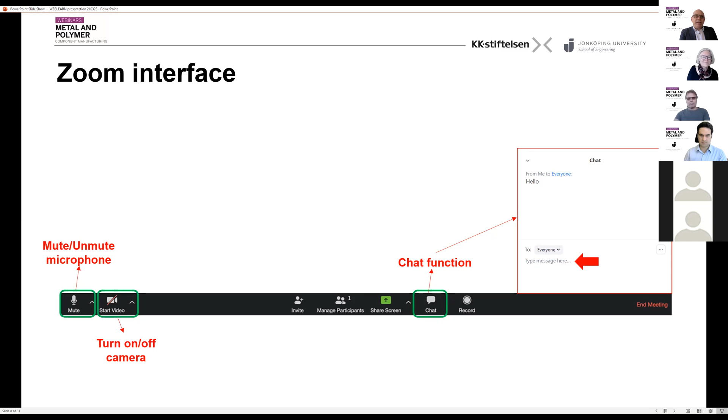Yes, thank you very much, Stefan. Well, today I will be talking about routes to high integrity casting, and it's a little bit of a process overview. You will see a small pink arrow over here and there, and I would like you to focus on that one when you see it, because then I'm talking about this particular element in the pictures that I will be showing.

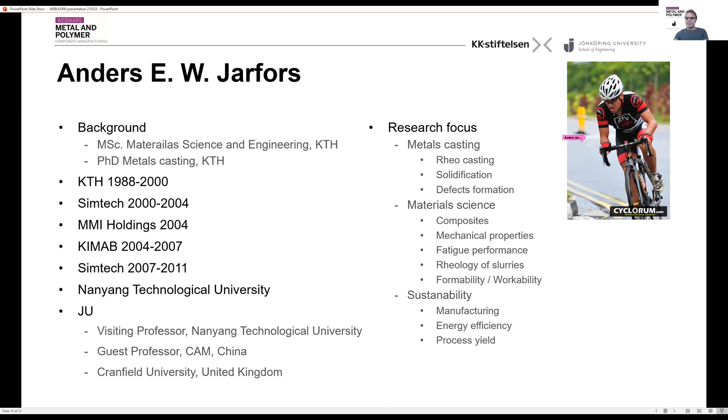We know that from the beginning we had a bit of downsizing with the fuel crisis. But everything that has to do with lightweighting and downsizing in terms of weight means material reduction, material substitution. We're also talking about cost effectiveness today, and that means that instead of joining many small parts, you can cast and functionally integrate in casting.

This means that defect management becomes very important, because we want ductility in the parts. We definitely want crash-safe cars, and we do not want a lot of scrap, because if you cast something as big as a quarter of a car, there's a lot of cost in that, and we definitely want high process yields. So there are many different ways of achieving high integrity castings.

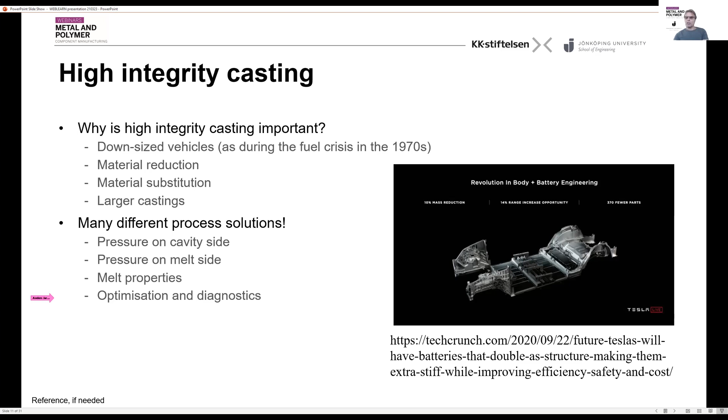We can work with the pressure on the metal side, meaning increasing the pressure. The difference between the cavity and the metal side is also very important, because that drives the filling process. We can also work with the melt properties to change the behavior of the melt. And what you'll also see from Lothar a little later today is optimization of the process, diagnostics, and things you can do with modern technology. So next, please.

One of the most standard processes for high quality castings is low pressure die casting. In low pressure die casting, you have a furnace cavity or compartment which is hermetically sealed, and you increase the gas pressure. That forces up the melt through the stalk into the die cavity. To avoid a turbulent fill, you can calculate a critical speed using the Weber number, and you end up with about half a meter per second as your fill speed. For low productivity processes and short fill lengths, this would be sufficient, but when casting a quarter of a car, you need much higher speeds to do that. So we can take the next.

There are some ways of improving the low pressure die casting process: the vacuum riserless and the pressure riserless casting systems. For the vacuum riserless system, you have a hermetically sealed compartment above the actual die system, where you suck up the melt through vacuum into the die cavity. There is also the pressure riserless casting, where similar to the low pressure die casting system, you have a compartment where you increase the pressure and force the melt up.

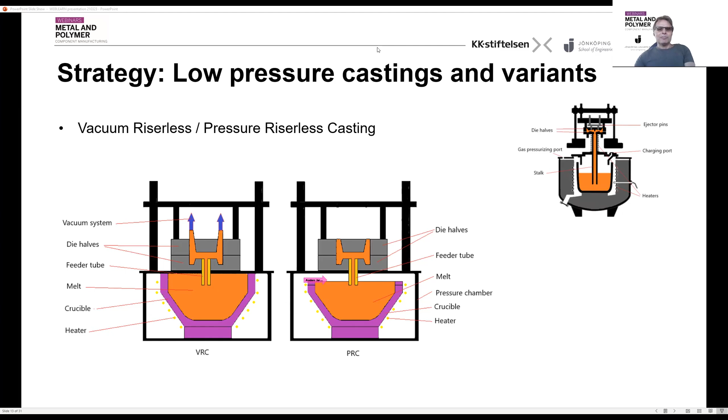There is another way you can do this, and that is counter pressure casting, which works in a similar way. You have a system where you pressurize the furnace chamber, with a hermetically sealed compartment around the actual die itself. You can pressurize the chamber, forcing the melt up the stalk, or work with super pressure in the furnace in the die compartment. With increased pressure in the die compartment, you can get a more quiescent type of fill during the process. Melt breakup is not as likely as it would be with vacuum, for instance.

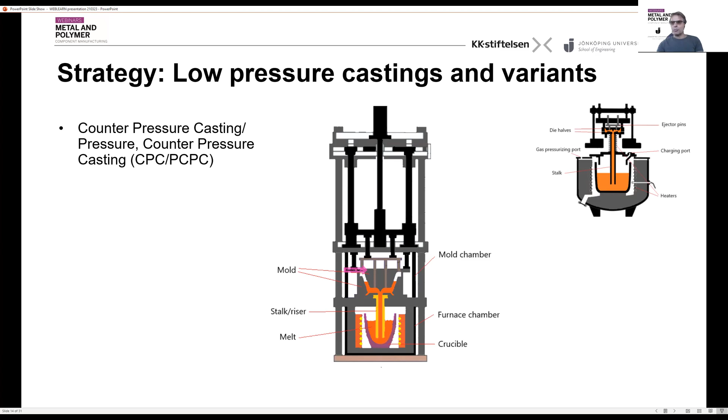You can work with the pressure difference between the furnace compartment and the die compartment to control the fill. By varying the two pressures, you can also control the speed during filling, because speed during filling is essential for all these casting processes.

Talking about all these counter pressure and low pressure die casting processes, they are normally for larger car parts like wheels, with moderate productivity. If you really want higher productivity, you need to use high pressure die casting. High pressure die casting works by pressurizing the melt directly with a piston instead of pressurizing the furnace compartment. So instead of working with the furnace, you have a hydraulic system and can increase the pressure significantly. The new variant here is to work with melt side pressure, which means you can squeeze and reduce the size of porosity.

There are ways also where you use extreme pressures, like squeeze casting and liquid forging. You can also work with reduced pressure on the cavity side - not really a counter pressure, but more evacuating the chamber itself in order not to entrain gas during filling. But then there's a lot of work to control turbulence, and ways to work with changing the viscosity of the melt, which we will come to.

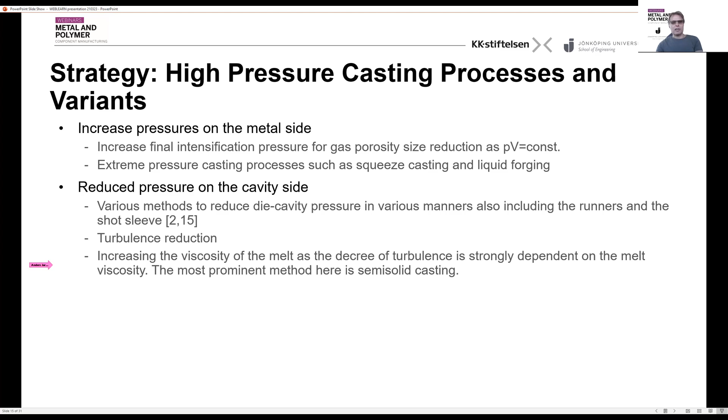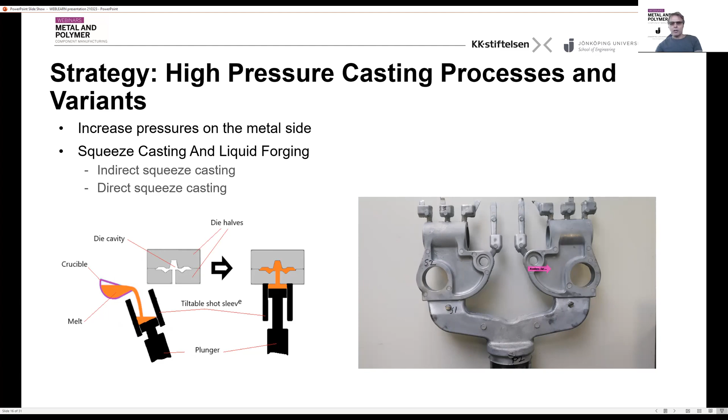Next is direct squeeze casting. The difference is that you do not have a plunger moving the melt into the die cavity; instead you pour it into the die cavity and use a punch from the top, just like a forging operation, squeezing the melt under high pressure. This gives a very pore-free result, and experience shows that if you reach about 50 megapascals of actual pressure in the die cavity, you will get a pore-free structure.

There are other ways of working with this, such as a process called liquid forging, where the actual geometry sits in the punch itself. This is formed like a backward extrusion process, and the fins you see here are 6 centimeters high and about 1 millimeter wide.

And they can be cast in many different alloys. In this particular alloy casting, it is 6061, so it's a wrought material. And you can actually bend these fins around their own radius.

In general, when you look at the common materials that have been squeeze cast, you can see that you get decent properties, but foremost you gain on elongation. The issue with this is that size is, of course, a problem in squeeze casting because you need very large machines and such.

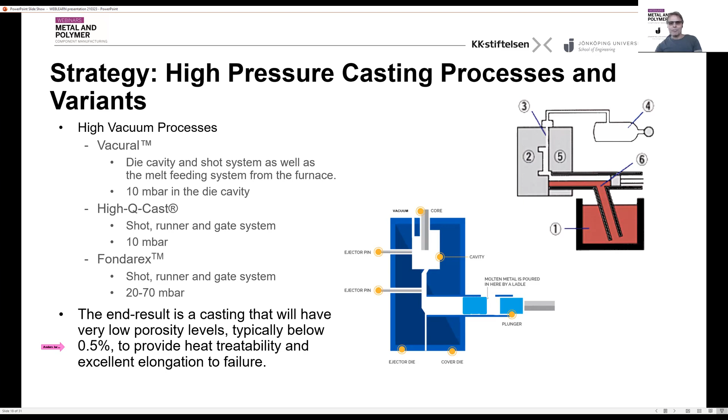Now, in all these processes, the die release agent can definitely cause a problem. And I would like to show you here one little example, because it's not only the pressure in the chamber that is important.

This is from a study with a foundry that had a problem on rainy days, where you had a very large rejection rate on the rainy day, but on the sunny days, it worked like a charm. It turned out to be so that it had to do with the evaporation rate in the die, and there were some clearances between different parts of the die where you had die release agent getting stuck.

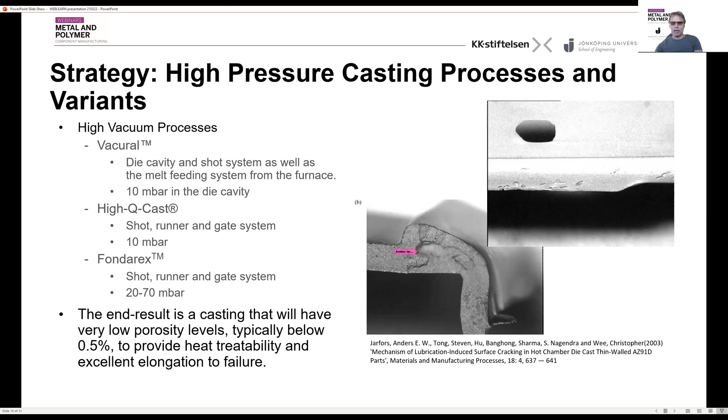At this point, you can see a bubble trail moving through in the same direction as the fill direction. These little bubbles have been pickled - we pickled away the surface so that we could reveal these types of porosities that you would find. And this is one of the problems. So vacuum does not really solve all the problems, but you also have issues with die release agent and the use of that. So you end up, when you want to do high integrity casting, with a very complex situation. I will come back to that later.

Now, another way of working with this is to look at semi-solid casting. This equation may not be very famous to many of you, but it's from Albert Einstein and his thesis, Eine neue Bestimmung der Moleküldimensionen. He studied slurries in his early days, and he developed an equation for viscosity where Fs is the solid fraction. This is for dilute suspensions.

And you can actually use this concept by understanding that if you have a certain portion of solid, you will increase your viscosity. That means that if you abide by rules such as increasing the viscosity to maximum that you can, which means using the highest possible solid fraction, that means you get the highest viscosity, which would be a turbulence reduction.

To enable fill, you need to use the highest possible die temperature because it aids the filling, and you can also reduce the fill speed. Even though you use a high pressure die casting system, you can significantly reduce the fill speed in semi-solid casting, and that means you can reach a defect-free material.

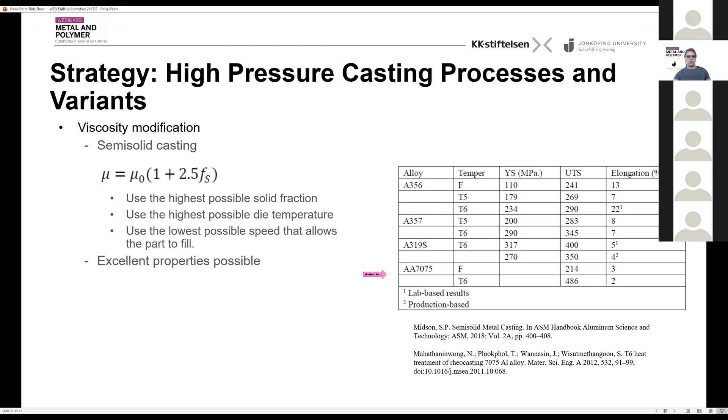One should take care here that you cannot do this effectively for eutectic and pure metals on a large scale, so that is a limitation. It depends on your material selection. We can take the next.

Now, looking at this, there are some additional advantages. If we set 0.5% here as porosity, and compare conventional high integrity casting with rheo casting, combining all possible means - using vacuum and high pressure die casting, rheo casting and vacuum - this is the end pressure of the machine, the intensification pressure at the end of the fill. You can see that to reach this 0.5%, you need a lower end pressure for rheo casting, which is the lower line, than for the upper line, which is conventional casting.

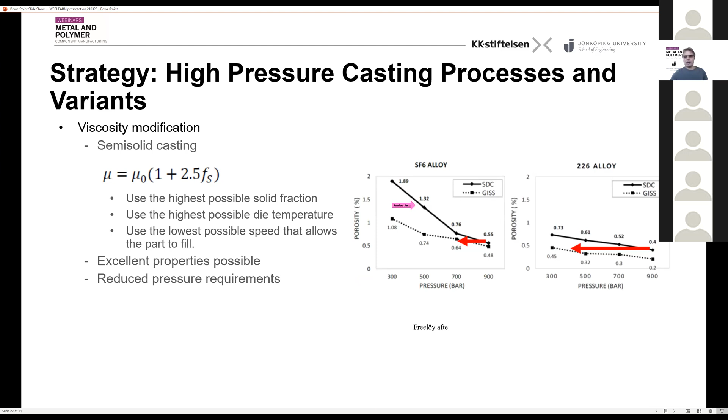And that means you can actually cast the same part in a smaller machine because you require lower pressures. In terms of supply chain, you don't need the largest machine available - which, if you take the 6,000 ton machines, maybe only 10 are available in the world. But if you can do that in a 4,000 ton machine, there are many more machines available. So that is also supply chain support.

So we can take the next. Now, there are also some other bits and pieces here. I just wanted to show you this, which is the fill length - how far you can fill, knowing that we can change turbulence.

If we look at the fill speed, knowing that when you have at least 30% solid phase, your heat transfer coefficient, H here, is about half of that for conventional casting - that means if you lie in the range between 30 and 50%, you get better fluidity as well. So that is another argument for working with viscosity modification as a means of making high integrity castings. So we can take the next.

In general, I'd like to summarize this initial part by saying that if we look at low pressure strategies, the important part is really to allow a slow, quiescent filling. That is done by controlling either the actual pressure increase or the pressure difference between the die cavity and the furnace side. If you go to high pressure die casting, you have many more strategies.

Okay, can you see it? Yes, and you can hear me, obviously. Super. My name is Lothar Kallien.

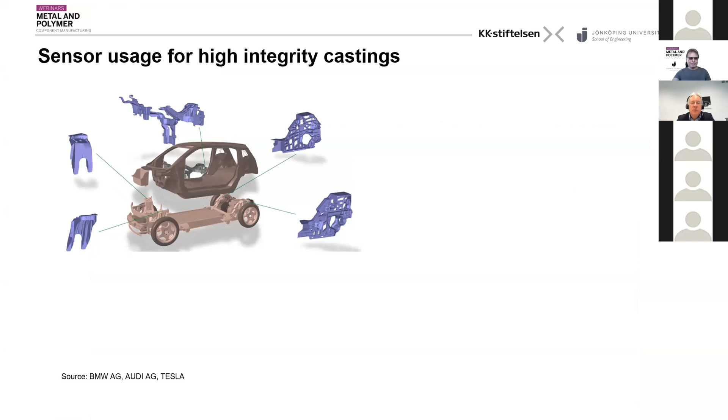I'm from Aalen University of Applied Sciences in Germany, and I'm going to talk about how to control the process a little. And I have some nice pictures again, because foundry is something old-fashioned stuff, but since we have electric cars, not only from BMW, the i3, but also Tesla, we are in everybody's mouth, because we may be able to make lightweight, thin-walled parts which can substitute steel parts.

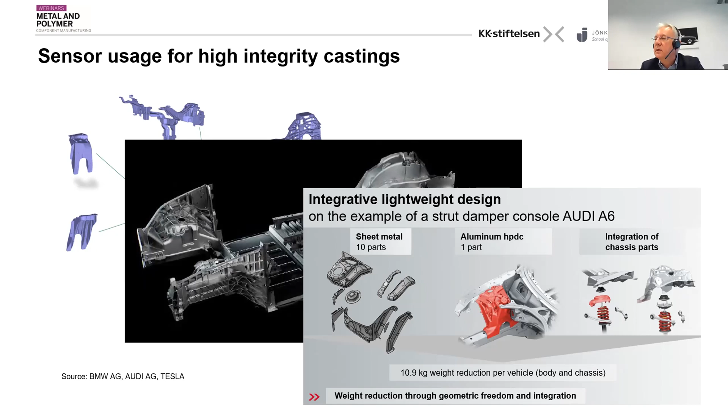Sheet metal parts is my favorite overhead from Audi: 10 parts substituted by one aluminum part. Here you can see in high pressure die casting gives you a weight reduction of 10 kilograms per car. That's huge. And this is just a very new picture.

I just added it because it shows from the new Tesla. The old one, left side, is 70 parts, and he is going to substitute it into one part. And what you need to do this, of course, is a huge machine.

Anders already mentioned that it's a 6,000 something ton machine, and it's very huge. Tesla ordered the first machine which has more than 6,000 tons of locking force. That's crazy, but Elon Musk can do it.

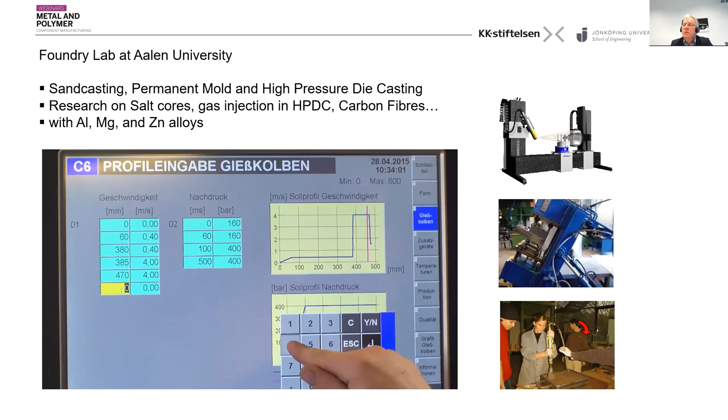Okay, what are we doing in our lab? We have a very nice lab with 3 high pressure die casting machines. We can do sand casting, permanent mold, and we do research on salt cores in high pressure die casting, gas injection in high pressure die casting, and carbon fibers, and we can run aluminum, magnesium, and zinc alloys.

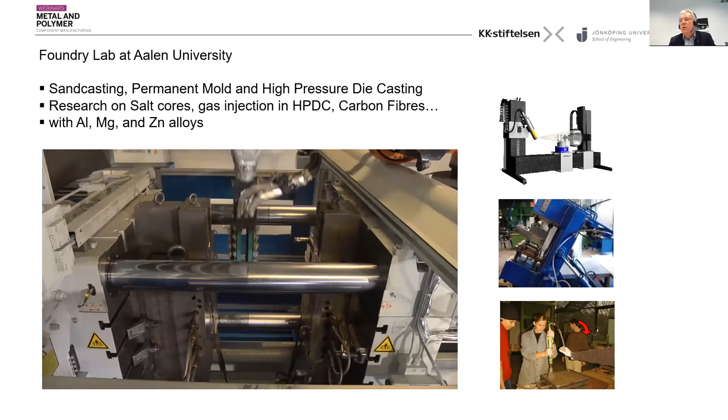Here you see our middle machine, 400 tons, doors closed. We have automatic spraying - this is a parting agent Anders was talking about. We have a new system to dose the metal into the shot chamber. In this case it's aluminum, but we can also use vacuum, magnesium, and all that stuff.

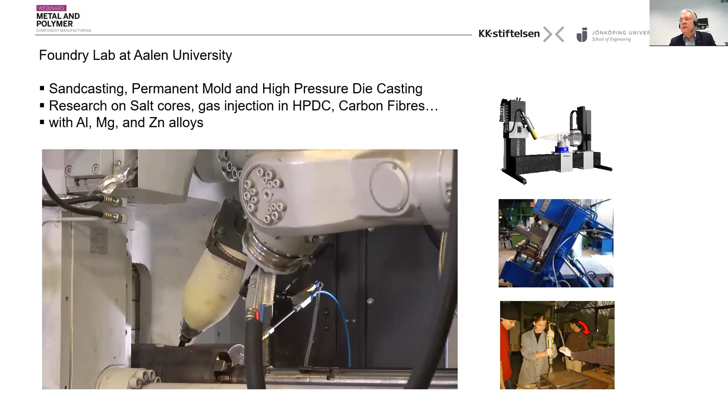And so this is the plunger. The shot is coming now. It's moving relatively slow at the beginning, but fast during filling to get very short fill times. And then we can open up the die and have a very nice part, which is typically taken by a robot in an automatic production cell, but here we do it manually.

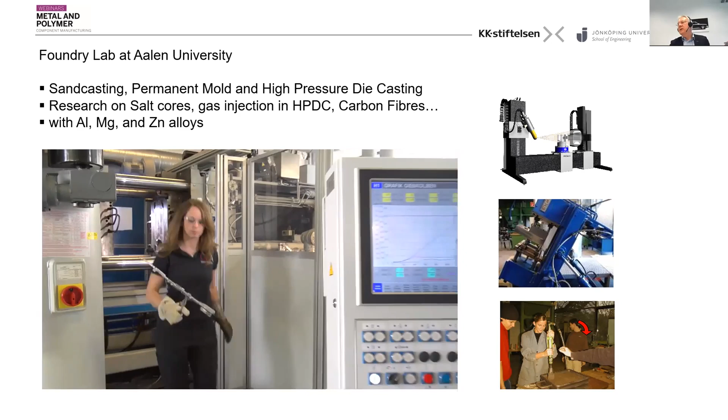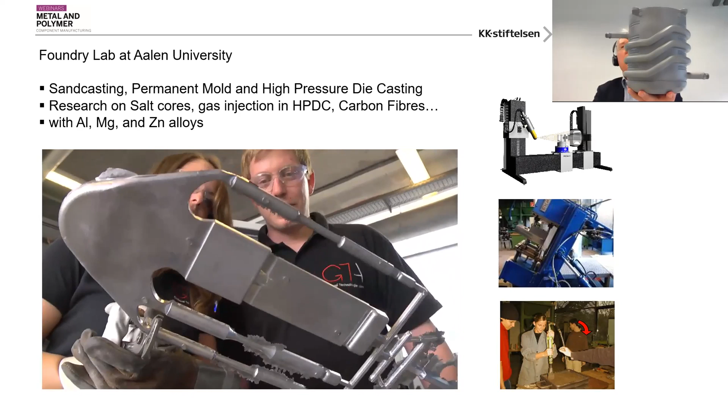And what is very interesting, I can show you here in the hand - this is the best we all did. This is a housing of an electromotor, and this electromotor is for an i3. It's a demonstrator only, I must say.

And the cooling channel we put in by blowing gas with a lot of pressure, nitrogen in here, and all the liquid melt is blown out on the other side. This is a length of 2 meters 35. So this is, I think, unique - the only people doing this crazy stuff is here in Aalen.

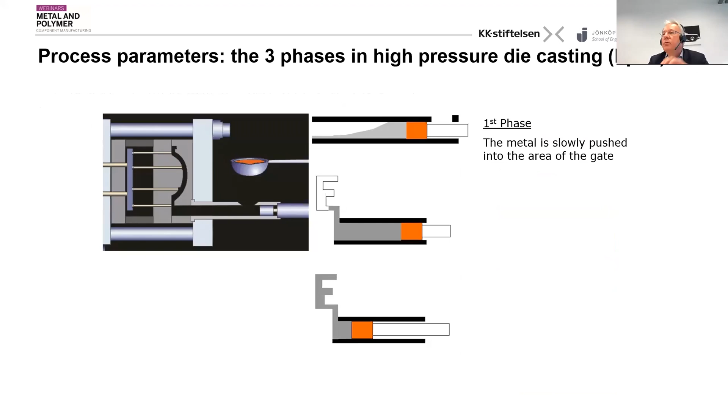Okay, but now we come to the 3 phases. The first phase, the metal is put slowly to the gate. And in the second, we have wave formation, pre-solidification. A lot of problems can evolve.

Second phase, where we have the metal shot into the chamber, into the cavity, with very short fill times - 30 to 50, maybe 70, 80 milliseconds. And then we have the third stage, where we can get shrinkage porosity. We apply a lot of pressure just in order to feed and have no porosity due to shrinkage in the part itself.

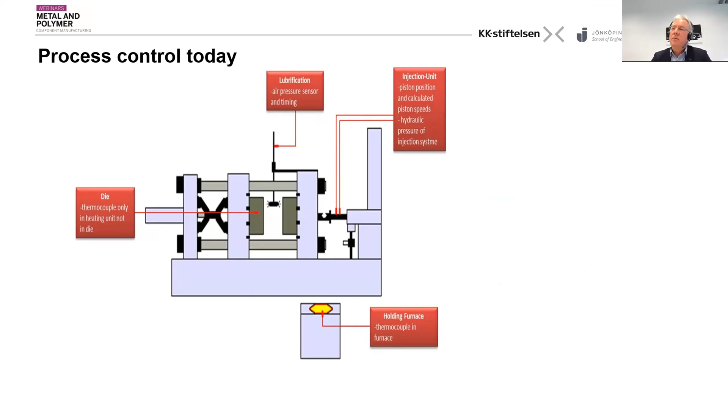What do we control today? Basically not a lot. We have a temperature in the holding furnace. We have the injection unit where we at least have a shot profile. Lubrification - only a minor few people do it - and die thermocouples, I don't think a lot of die casters use it.

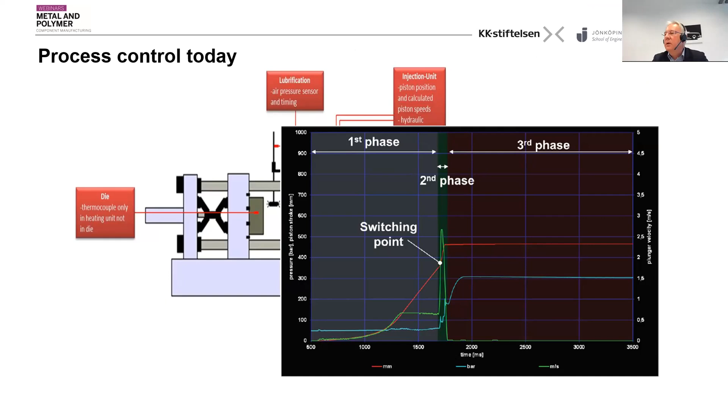So what we get is this shot profile: first stage, second stage, third stage, pressures and velocities of the plunger, and then we can calculate the velocity of the melt and stuff like this. And we can get a lot of information from this.

But the dream of a high pressure die caster is to understand the process, and this is what I'm going to talk about in the next 20 minutes. What should we use? Control much more data from the evacuation, from the die cast machine, from the lubrification, and everything.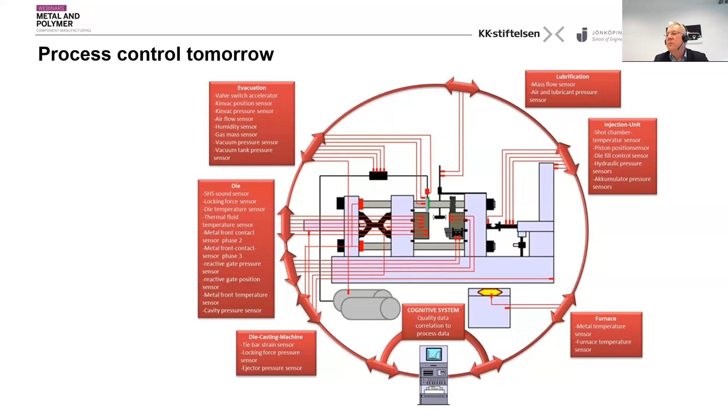But the problem is we have so much data now, we need to understand the data. This is going to be the problem. We had a project called Music, a long time ago, where we tried to get a cognitive system where we get all the data in, but then you also need quality data. This will be the thing we talk about, to understand and then control the process with this.

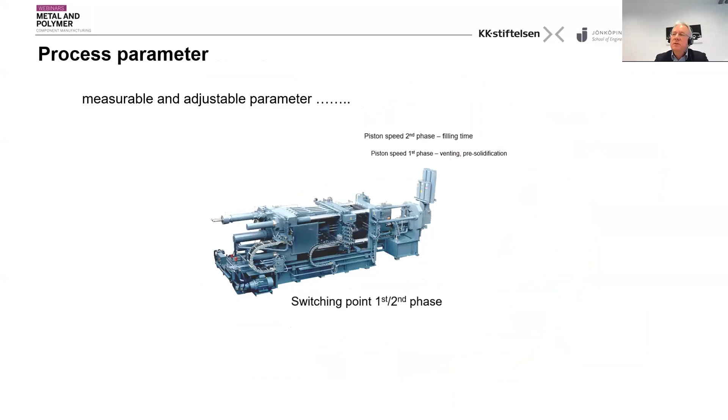So we have a lot of process parameters. Some people say 200 parameters in high pressure die casting: piston speed, first stage switch points, holding pressure, mold temperatures, flow rates, cooling time, and so on. You can talk half an hour about every process parameter here. But also the other parameters I showed, we think we can control them.

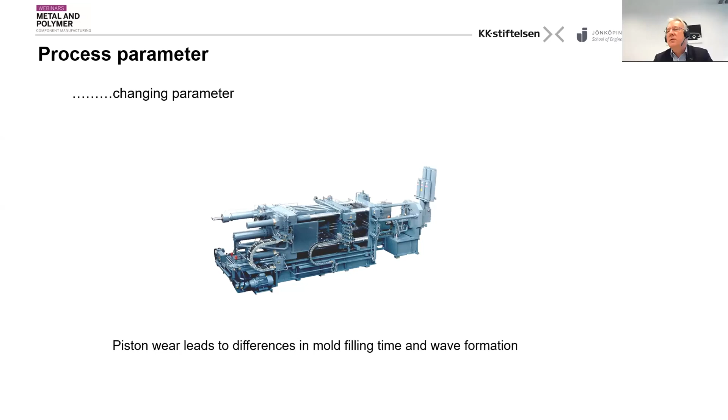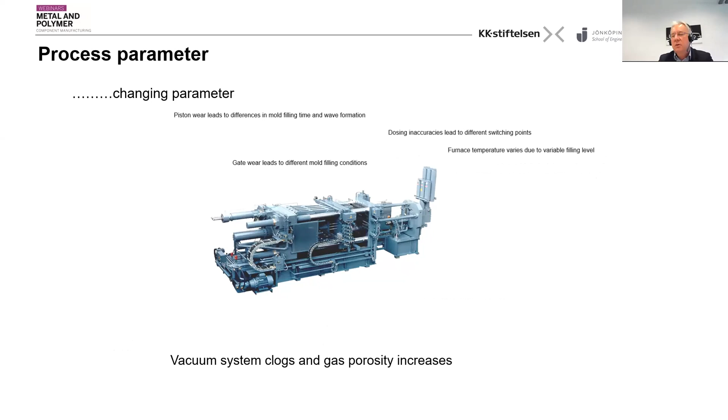But we also have parameters like these that change during the process. Piston wear, or dosing changes, or gate wear, or furnace temperatures vary because people put fresh liquid metal in with another temperature, which changes the process as well. So we can talk about parameters again for half an hour, at least about those which change.

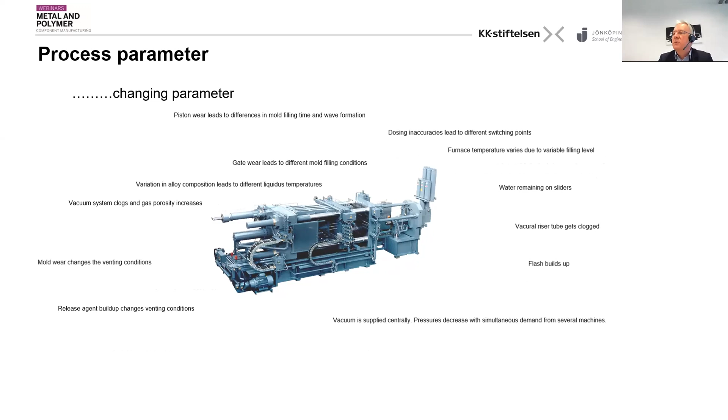So the big thing is we have a lot of process parameters. Now we need sensors to control it, because later quality analysis in the forecast is a goal.

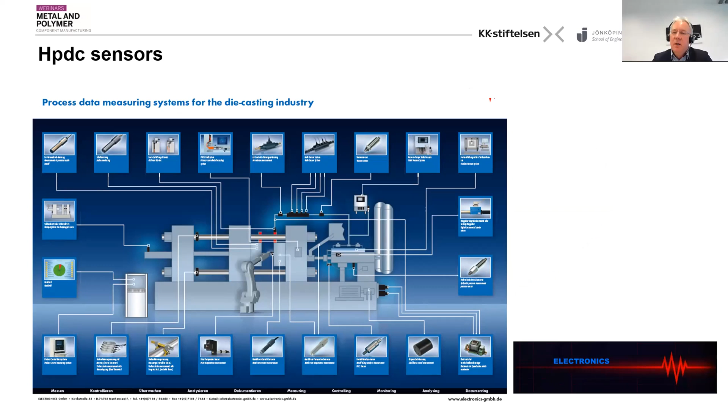And we have a very large amount of sensors because we have a very good company in Germany, called Electronics. If you're really interested in sensors for high pressure die casting, talk to Mr. Gauermann. He's the owner of Electronics, and we have worked with Electronics together for a very long time. They are very innovative people and have, as you can see, a variety of sensors. I'm telling you about our experience with sensors.

The first thing on the left-hand side here you see is cavity pressure sensors. I think that's very important because you only calculate pressures from the third stage, plunger pressure, into the melt. But now you can see with these cavity pressures, which hold up to 2000 bar, and they last a very long time. We never made 100,000 shots with them in the lab, but I think they do at least last 10,000 shots or something like this. So they're ready for industrial application.

You get information about cavity pressures inside the die, and this is really important for the quality of the part. On the right-hand side, of course, you have classical hydraulic pressures, which are used for a conventional shot chamber, shot profile already today.

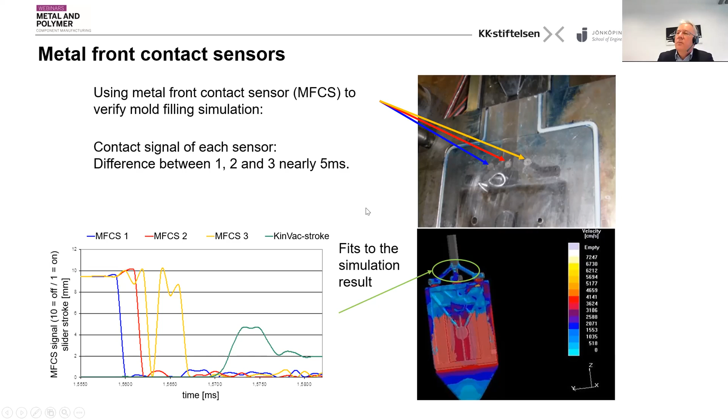What is also new? Metal front contact sensors. For our gas injection process to produce these parts, we need to know exactly when the metal is where. So we can build in sensors which have a little electrical contact, and you can see here 3 sensors in these points giving you different signals. You can, for example, also control simulation. Is the simulation you made with Magma or another code, does it fit to your real experimental idea in the die? What is happening there? This is also very interesting and not very difficult to install.

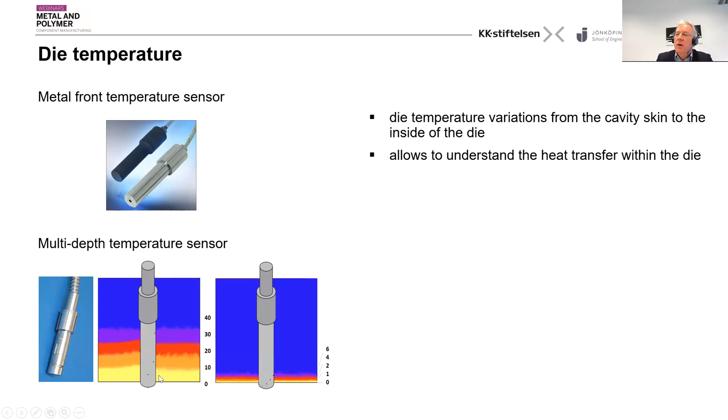Also, die temperatures, very crucial for the quality of a part, is the metal temperature, but not only the metal temperature right at the surface, but also inside the die. Electronics offers a sensor which gives you multi-distance readings. Right here, right here, and this shows you the reading you get out of it.

But again, until now, not a lot of people are using it. And I don't really understand why.

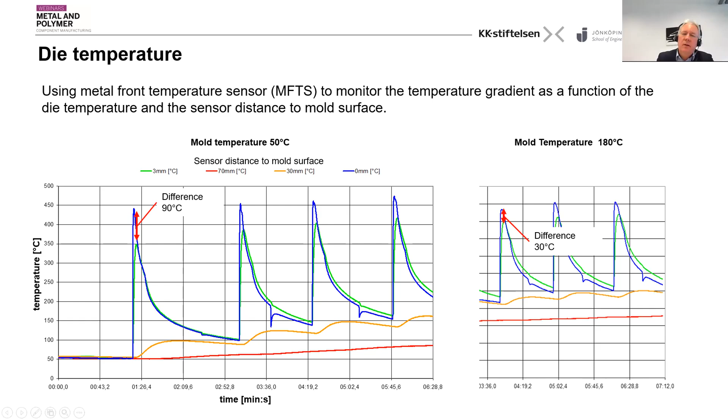The die temperatures are, of course, very much controlled by tempering oil. You have oil cooling and heating systems near the machine, close to the die, and you set them to 50 degrees or 180 degrees, and you assume the die will, after a certain time, also have 180 degrees. But nobody really controls the flow. Is the oil really flowing into it? I think this is a very inexpensive, very good usable tool to control oil flow, not only temperature, but the flow rate.

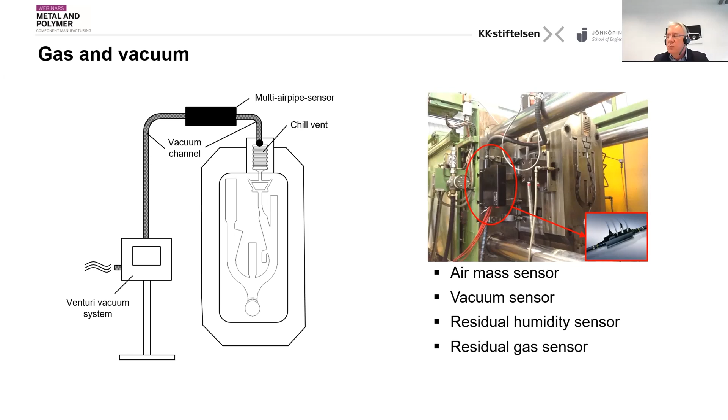Anders already mentioned vacuum. This is very important, and we use Vacural process, but also classical standard vacuum processes. What people measure here is only basically the pressure in the cavity. But here we have a multi-airpipe sensor, and it measures the air mass you take out of the mold, the vacuum, the pressure, the humidity of the air, and this is very important. It's a very innovative new sensor, but I'll show you some results, and residual gas.

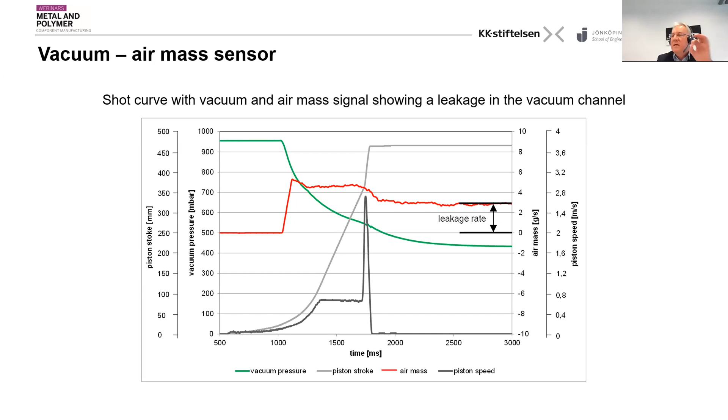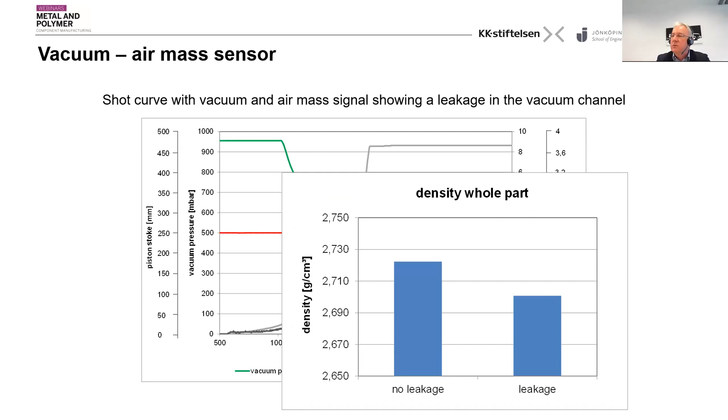What we see here is a shot curve with vacuum air showing no leakage. You can see here in this sensor, this is the air mass, not the pressure. Vacuum pressure is the green line, and the gray lines are just piston speed and stroke. And here you see the same with the leakage rate, and you can clearly see a big difference, which does not show up so clearly in the green curve, but the air mass clearly shows the difference. Of course, we also measured densities, and this is clear: no leakage versus leakage gives a big difference in density of the whole part.

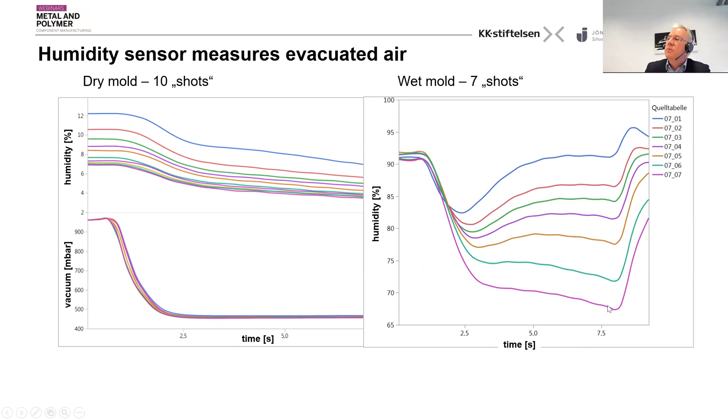What else do we have? We're talking about spraying. This is also important — we have a flow rate sensor for the parting agent. That's been available for a long time, but again, not a lot of people use it. We built it in, and I can tell you it's very important to control this. You can also see the difference very clearly in the infrared camera picture of the temperature of the die surface, I'll come back to it later.

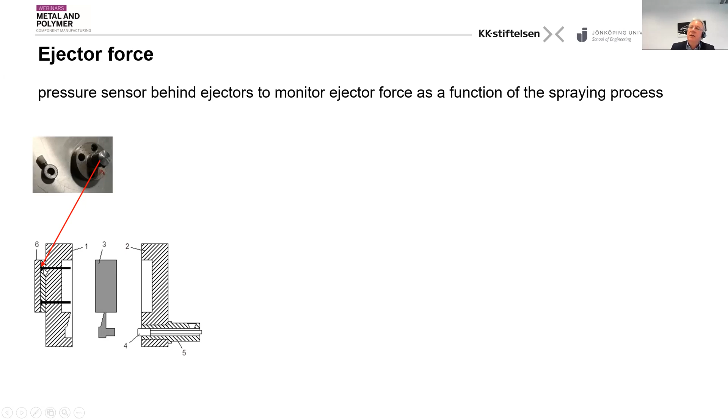Another sensor we use a lot for parting agent control — some people ask, can you give us an idea how different parting agents work, is one better than the other, do you have numbers? We developed a tool where we measure the ejector forces. So we have pressure sensors, as shown here, behind the ejector pins, so when we eject we can measure the pressures and get information about what is happening.

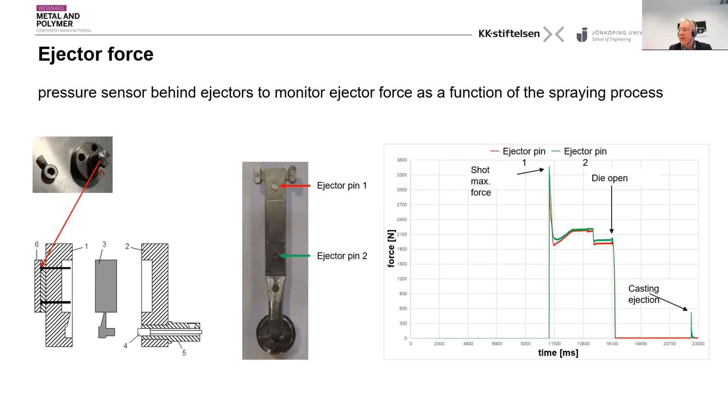Of course, we also measure the shot force during the shot, third stage, then the die opens — but here the small signal, if you widen it, you can see big, large differences between different parting agents or parting agent processes. So this is a very important tool also. I'm not sure whether it's usable for control in the sense of making full sense, but the maximum value, for example, you could use for a standard control in an industrial process.

Another thing another company, Motul, has developed — though I think it's available from other companies now too — is a spraying control unit using an infrared die signal. They take the temperature of the surface of the die to control the parting agent flow, but also the air blow. The time and amount of air blowing costs a lot of money and a lot of cycle time, and nobody wants to do it.

But you need to prove that your die is really dry, because otherwise you get real quality problems. That's a real issue here. Too cold, of course, gives you cold shuts and stuff like this, but it's also not so easy.

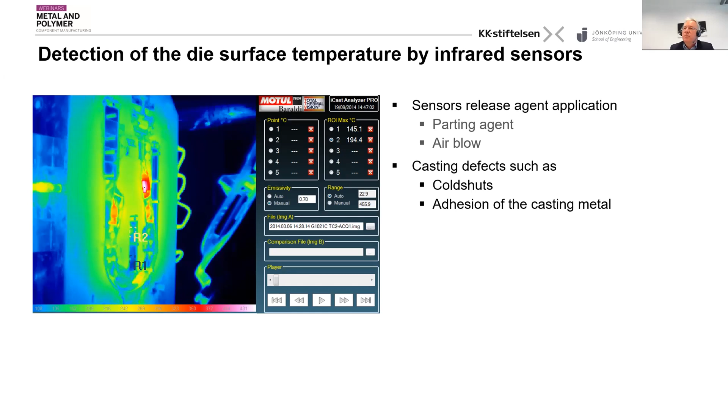What we did was, in our tests on this test casting you already see here, we didn't measure the whole temperature, but we concentrated on these small little red areas. The red areas were taken for process control or process monitoring. We always take a picture immediately after extraction of the casting and at the end of lubrification. That's very important, so you can see what is happening with the die. Does it change in your process?

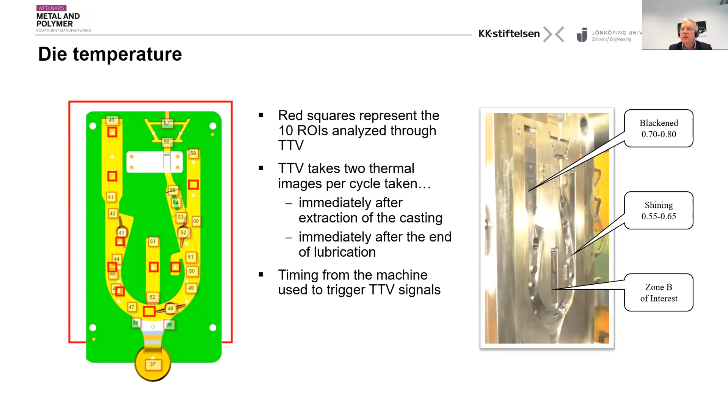And then for control of changes, maybe you only need 1, 2, or 3 areas of control, not so many as we used. Of course, if we're talking about infrared, there are a lot of things to control. It's not a Lambert radiator - some areas are more black, others are more shiny, so you get different temperature readings. But that's not really the problem, because you only want a relative signal to the shot before and the shot after. So I think you can use this very nicely.

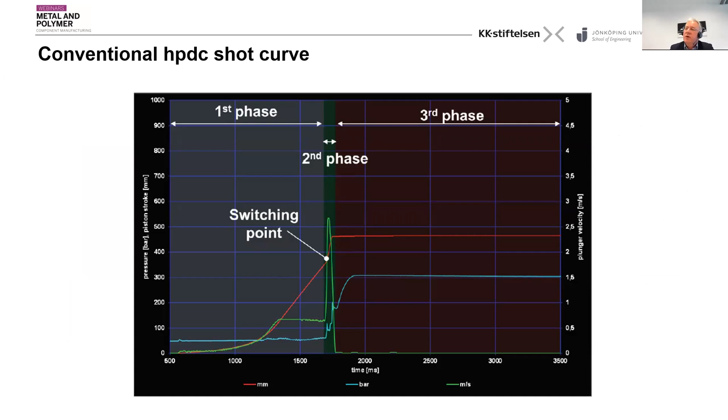So we have a lot of sensors, and we've seen this before. We have just 3 curves: the velocity, the pressure, and the stroke of the piston. And now we have something like this. And nobody understands it anymore, because it's so complex and so confusing for a lot of people.

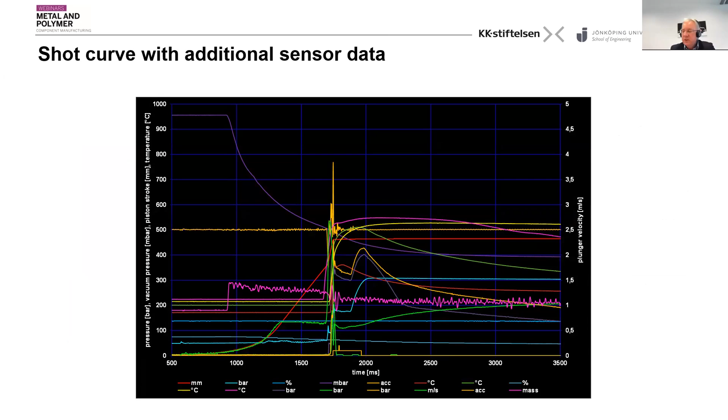So what do we do? The only other thing is we have the signals. We need to control it and put it together with the quality.

And just to show you, this is the real casting we use for a lot of trials for this. This is a casting where we built a lot of defects into it - distortion and shrinkage porosity and other stuff like this - just to see cold shuts, what is happening. And we put a lot of sensors in here: metal front cavity sensors, metal front and sound sensors, and other stuff like this, just to check what we can see.

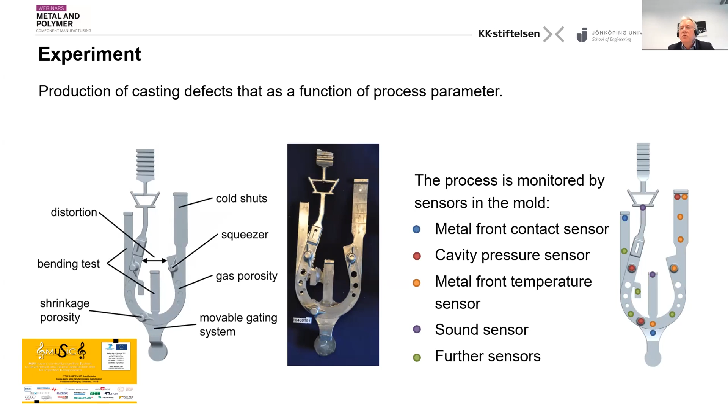Do we get more information? And it was done in the frame of a European project, MUSIC, a lot of this, but this ended a long time ago, and we are still working on the problem because it was not solved.

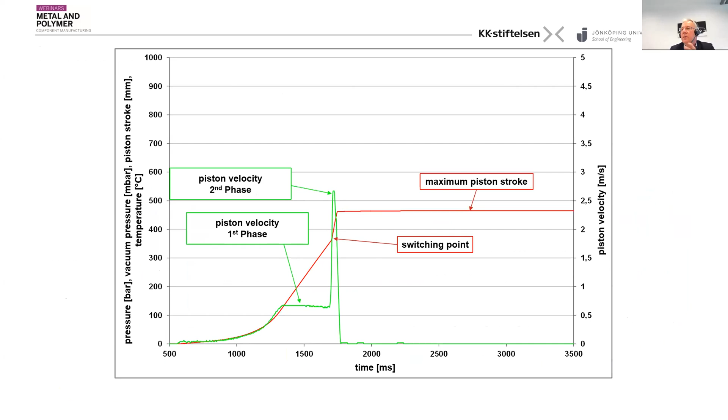And again, you get a shot curve, switch point, and you get a piston velocity. This is what we know - maximum pressure - but now we get a maximum piston acceleration. We get a maximum melt temperature, a mold temperature, a cavity pressure at this position, a maximum pressure, another solution, a vacuum pressure, and you can see a lot of data coming together.

And to understand the data, we need to evaluate the data. This is one of the things we have in the earlier stages of our analysis - taken only maximum data. So we have a curve here and we take the maximum mass rate evacuated air, or the maximum metal contact temperature, or the maximum cavity pressure here. But maybe it's how the whole curve looks.

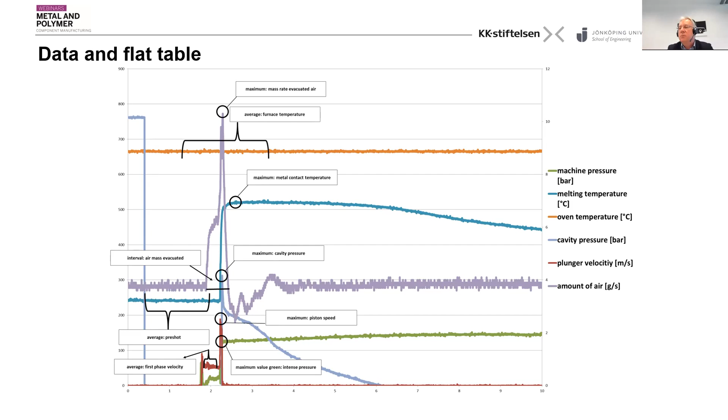And this is what we are working on now in the frame of artificial intelligence. We want to analyze the whole curve, because we think the first derivative - how fast does the metal contact temperature go up - also gives you very needed information about the quality of the part. But this is not yet finished. We are still working on it.

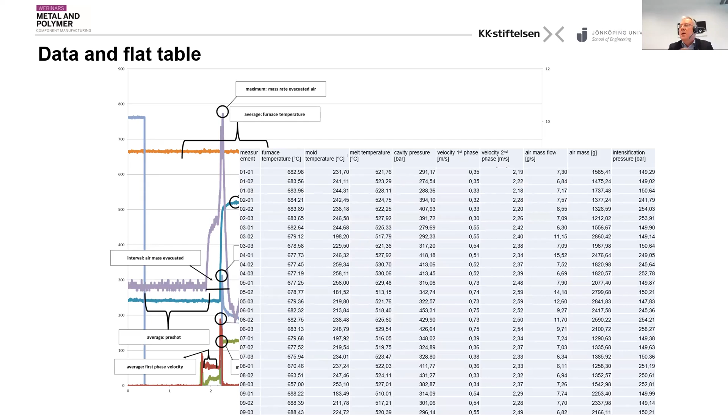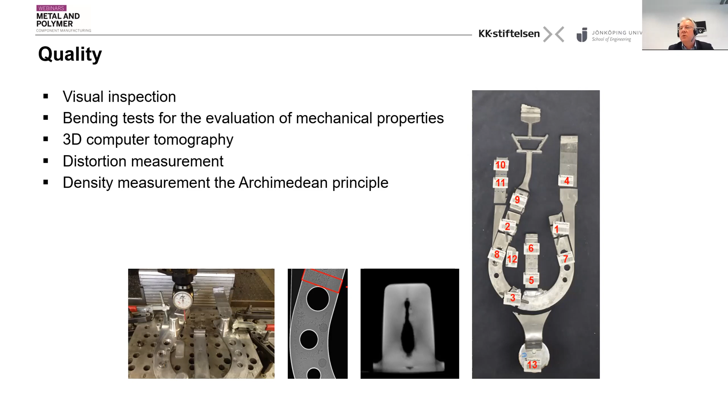Until now, you have to take all this data, extract maximum data or the points of the curves you think are important, and produce a flat table out of it. Then with this flat table, you can use it and go into your DOE and try to get information which is connected to quality. And quality - we did visual inspection, bending tests, computer tomography which is very slow, distortion measurement, and other stuff like this. And you get a big correlation matrix between the process parameters, sensor data, and quality.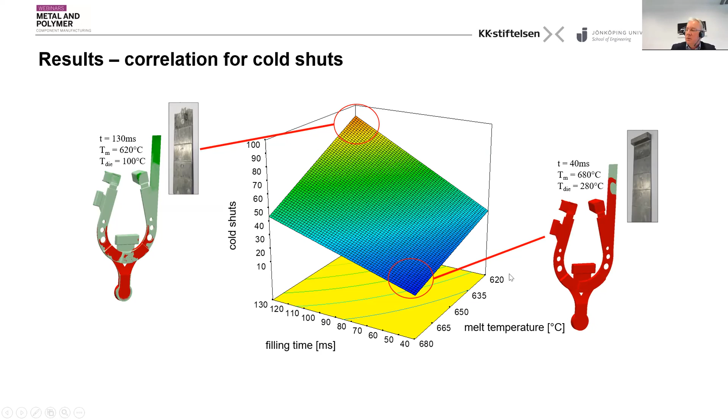It's much better on the right-hand side. You can see the melt temperature, which everybody understands easily, and the fill time have a big impact on cold shuts. But with DOE, you can get values in between, which you would not see if you only had a linear combination of effects.

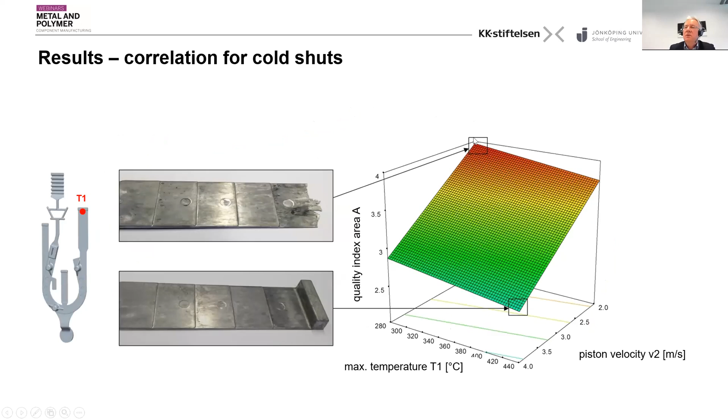Or you have maximum temperature of sensor temperature 1 and the piston velocity, giving you again a quality index area in this section. This was the sensor up here, and this is very clear. You can see the strong impact of sensor T1 on the quality index.

Or same for density, I'll go over this a little faster. Maximum pressure in the third stage and the machine pressure give you density information, which is in the dome, and you can see that on the right-hand side because this is X-ray or computer tomography.

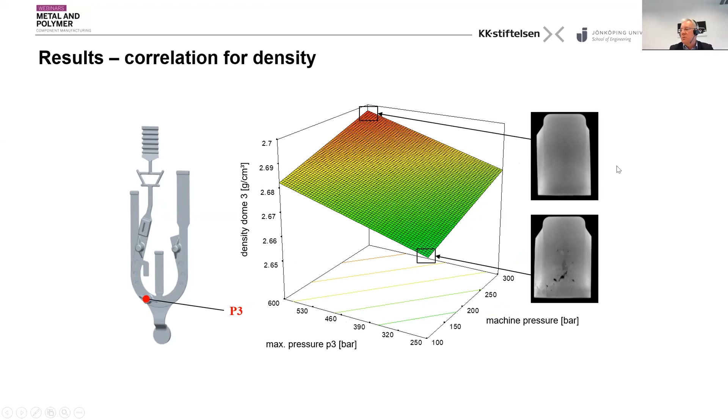We do have a computer tomography machine, a very new one, as you can see here from Zeiss. I'm very happy to have this here, where we can get excellent information about the quality, but it's too slow. We need something faster, much, much faster.

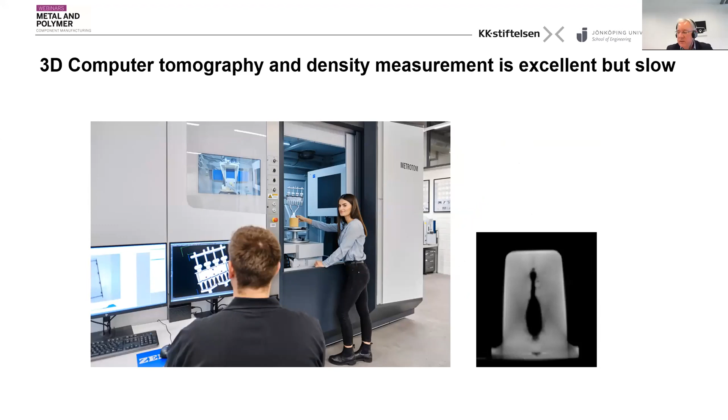And this is also where we stand now. I'll show you the first results of what we are doing to get over this. Years ago, in 2016, we also had the idea to get faster information about part quality, not with density measurements.

You don't have enough students to do that. Computer tomography takes half an hour for each analysis, but in high pressure die casting, we produce a part every 30 seconds. So this is what we have in mind right now.

This is our zinc machine, with 125 tons, a hot chamber machine. This is what we try to do: we have this part here, and on the surface of the part we can create cold shuts. We have the cast part, and we take a camera picture in a special dark room.

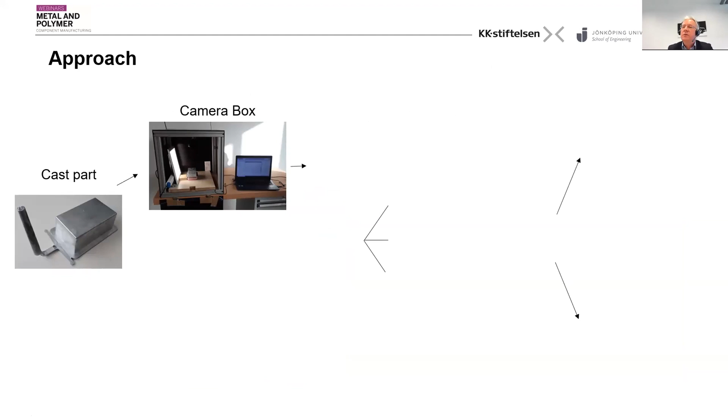It's a small box, as you can see here, under special light, so we see it all the time. And then we get a surface image. We want to put the surface image into a neural network and understand: is it a cold shot, or is it not a cold shot?

This is done by teaching the neural network. If it's a good part, everything is okay. If it's a bad part, of course, we have to adjust the parameters.

But with just a camera picture, we found it's not so easy to teach a neural network. So if you have the original image, we need to apply some filters, including an edge filter, and you get from this picture left to right, where you have some lines.

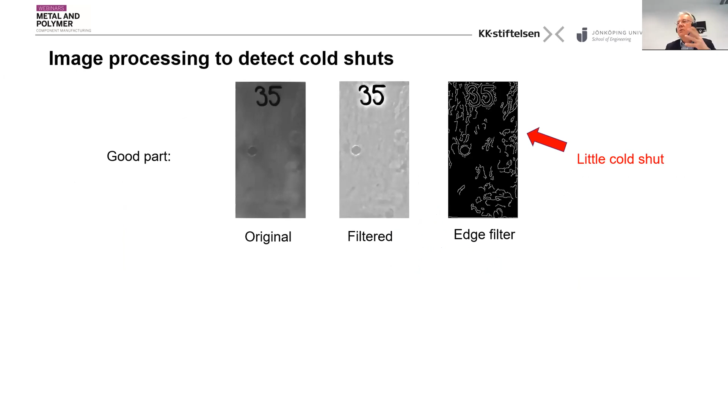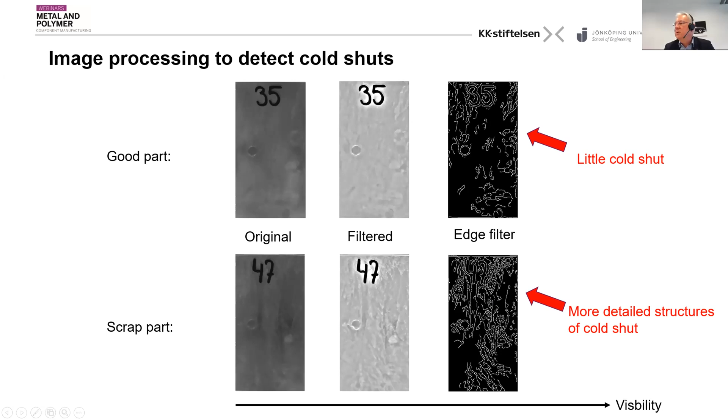And the lines, we hope, show somehow a digital version of the formation of the surface. We want to see the cold shuts. We have no cold shuts in the upper section, but you can see here in the lower section we have a different, extracted image. We want to teach the neural network with this.

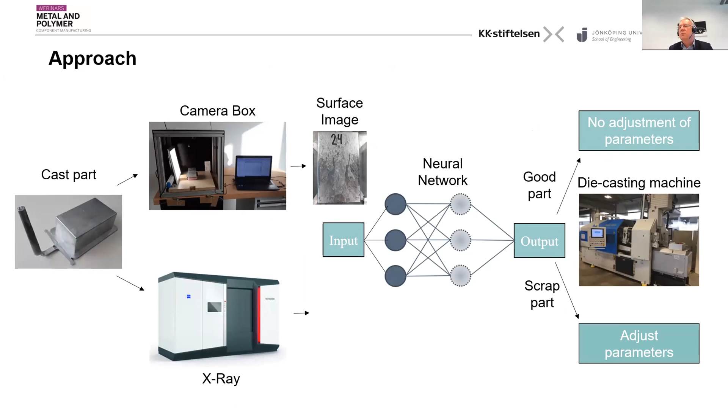It's not only visual inspection of the surface, but we also do it with X-ray, because X-ray—not computer tomography—is relatively fast. We can get an X-ray image, but here too the X-ray image looks like this.

We have visible porosity. We need to extract more or less a digital version of the left-hand picture, turning it into a binary black-and-white thing. Of course, you can make a lot of mistakes—this is also not so easy to do.

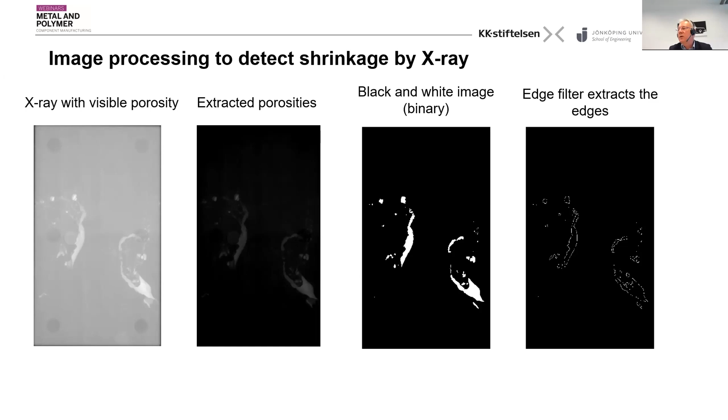This is what we're trying right now: not going from this point to this point and losing information, but taking this information over easily into the edge filter process, and then giving it to the neural networks, so defects are clearly visible. This is the goal.

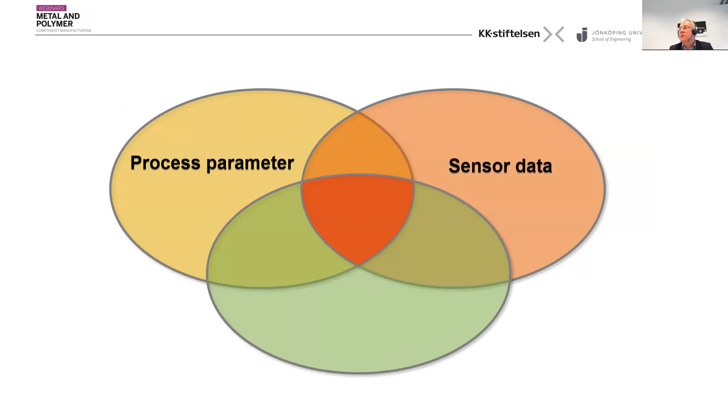So I've taken you from process parameters to sensor data to quality analysis. This, I think, is very important to understand: if you have sensor data, it's not Industry 4.0. If you have understood the quality connected to your sensor data, then it starts to become the industrial application 4.0, as we call it.

And of course, the final goal here is the forecast at the end of everything. I think that's about it, and I'm happy to answer some questions. Thank you very much for listening.